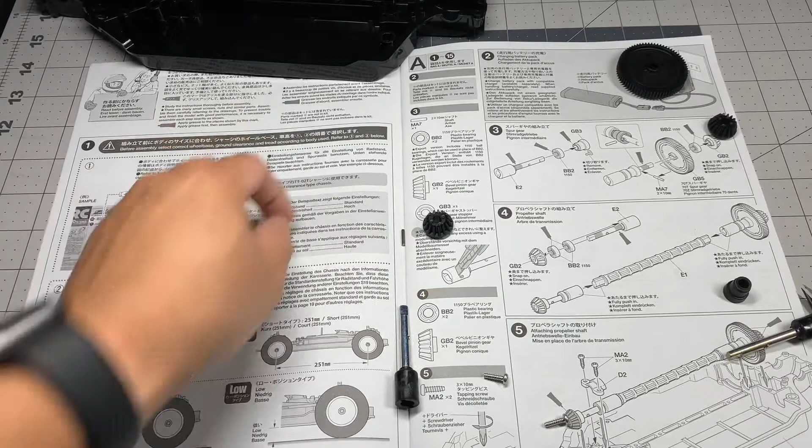This kit, the sand shaker, is going to be the standard 257mm wheelbase, and it's going to have the high clearance. So we're going to be building this just a little bit differently than other TT-02 kits I've built in the past, but everything else should be just the same.

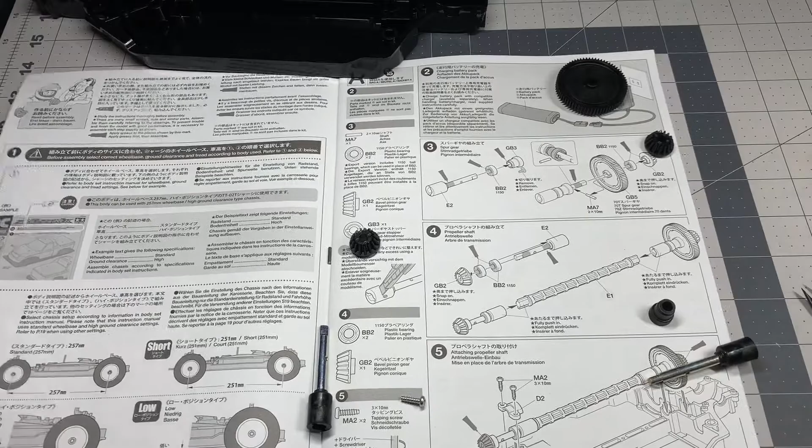So I always start off by looking at the steps and figuring out what we need. Step one is just a specification. Step two, we already talked about the wheelbase. And then you're going to go ahead and charge the battery. They always assume you're going to build this all in one day. So if you have a trickle charger and a nickel metal hydride battery, you want to start charging, because it's going to take like 8 hours to charge this.

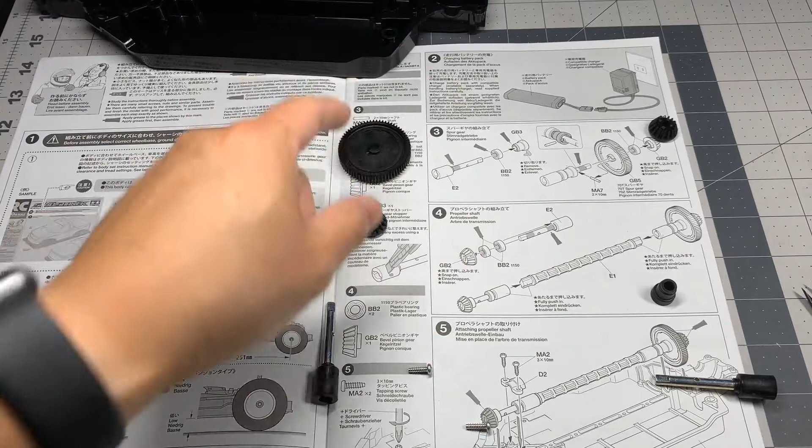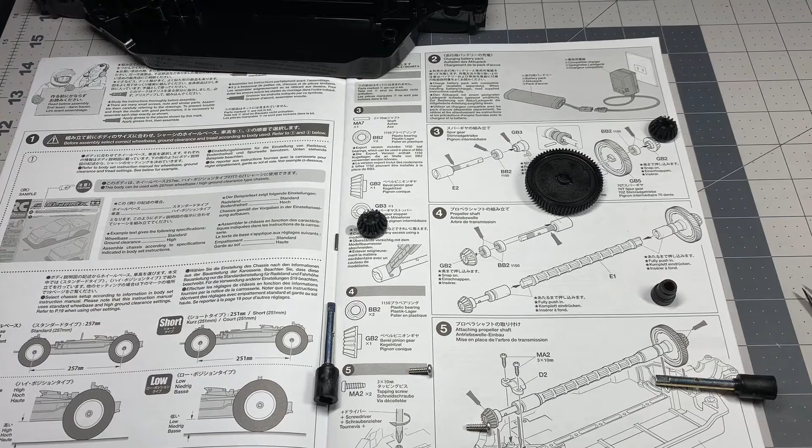And step three, we're actually going to start building. We need this MA7 pin and plastic bearings. And if you didn't buy bearings, you're going to be using this bag right here. And if you didn't buy bearings, go ahead and watch my video, top 5 things that you need to buy to go with your Tamiya RC kit.

But I went ahead and bought bearings as usual. Let me get these open. And I know I'm going to need a few of them for the first steps here.

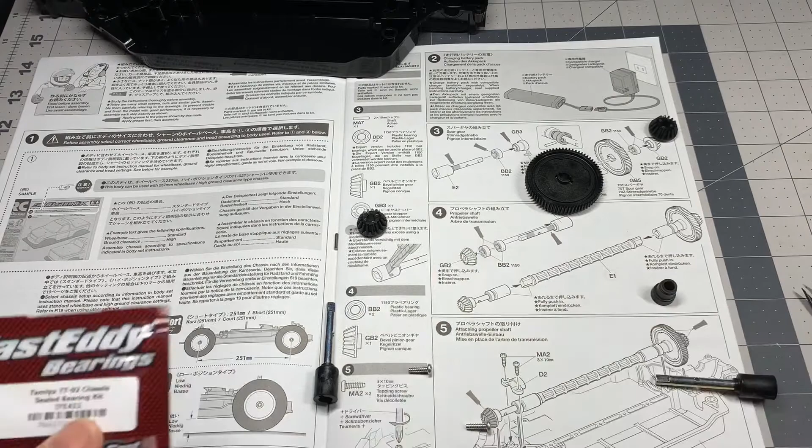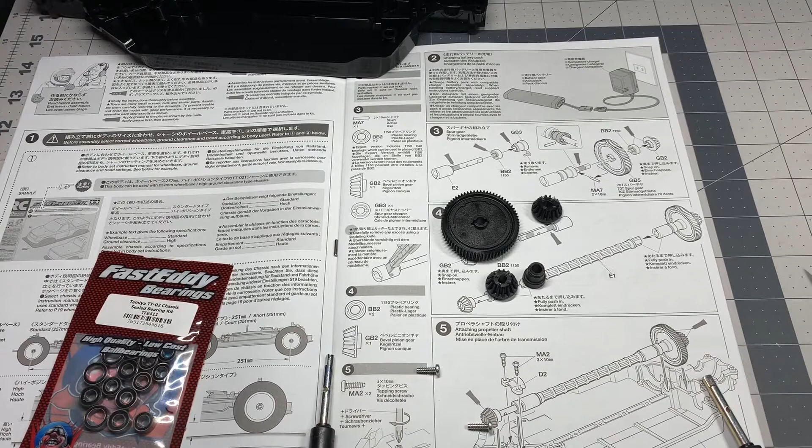You need to find this bevel gear, and these gears, the spur gear and all these parts right here, these 4 parts, were all in the same bag. The propeller joints and the propeller was on a tree by itself. And the bearings, of course, were in this bag. And the screws that you're going to need later on in this step and this pin right here were all in the A bag, and you just have to look for them.

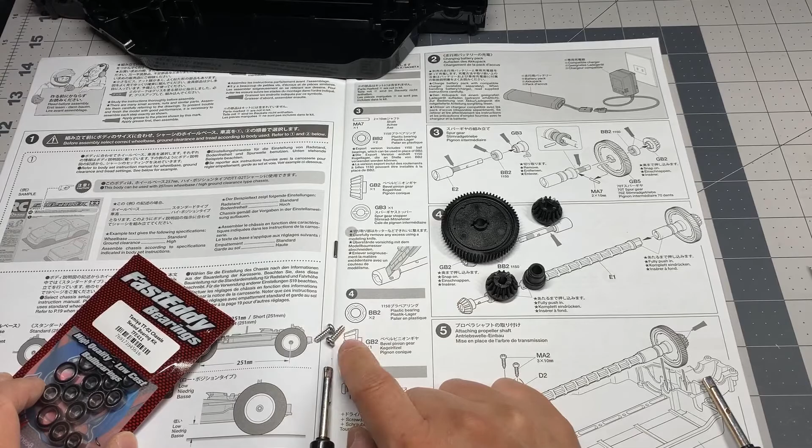The pin was kind of a little bit hard to find, but if you look for the black pinion gear, you'll find it there. And these are pretty common, these are everywhere. Okay, so let's go ahead and get started.

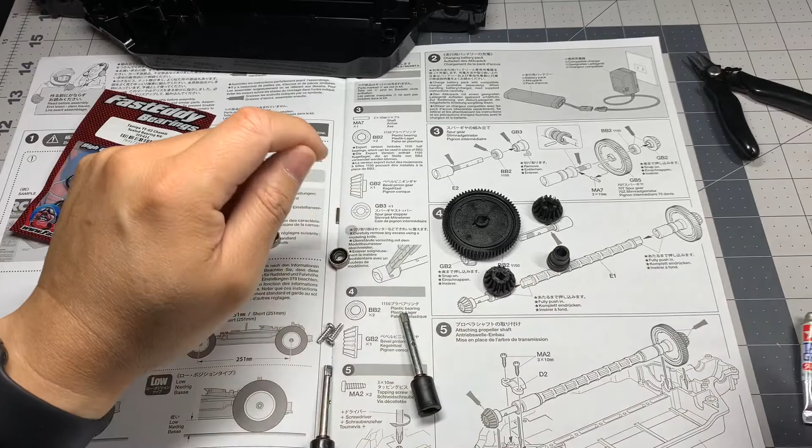Okay, the only thing you need for this build was your flush cutters to get the parts off the parts tree, and a little bit of grease. This is included in the kit. I have an old one from the last build, so I'm going to finish using that.

Step 3 here calls for taking this propeller joint, putting a little bit of grease right here. Actually, I'm going to skip that step. If you're using the plastic bushings, go ahead and do that. I'm using ball bearings, I'm not going to need to grease there, as well as grease the bearings.

I will go ahead and put some grease right there, because that is rubbing up against, that's going to be right here, possibly rubbing up against the bearing.

Okay, all I'm going to do is put the pin there and make sure it lines up, like so.

And then I'm going to take the spur gear, and before I put it in, I'm going to put some grease right there. But the spur gear on this side has a notch. That's the side you want to go towards that pin right there.

So it's asking for some grease right where the spur gear is going to be, so that's what I'm going to do. I'm going to spread some right there, like so. Again, side with the notch, and push it up against that pin and make sure it sets all the way in.

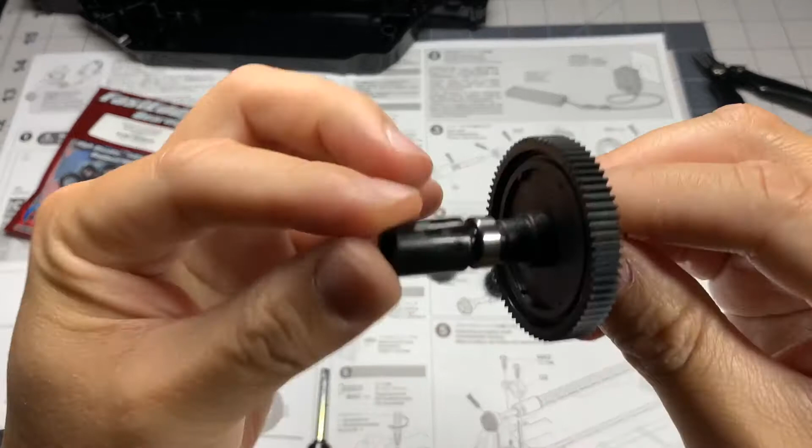So make sure your spur gear goes all the way touching that piece right there.

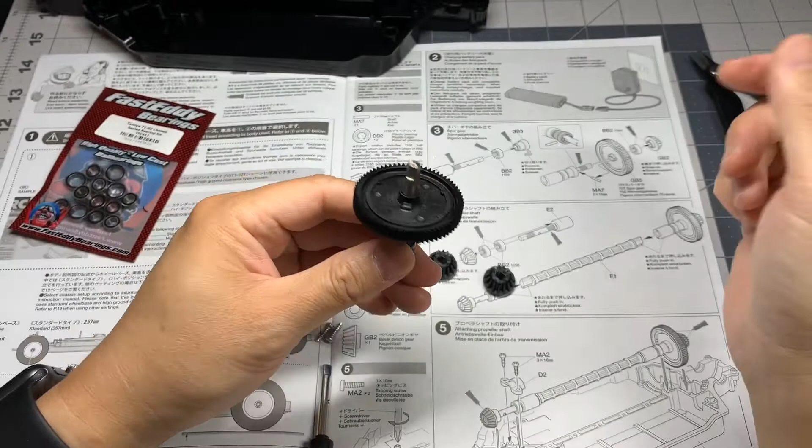Okay, then we're going to put another bearing. Again, if you're using bushing, go ahead and grease that, and then put the bevel gear behind that. We're going to hold on to this, put it aside. I'm going to be setting it into the chassis a little bit later on.

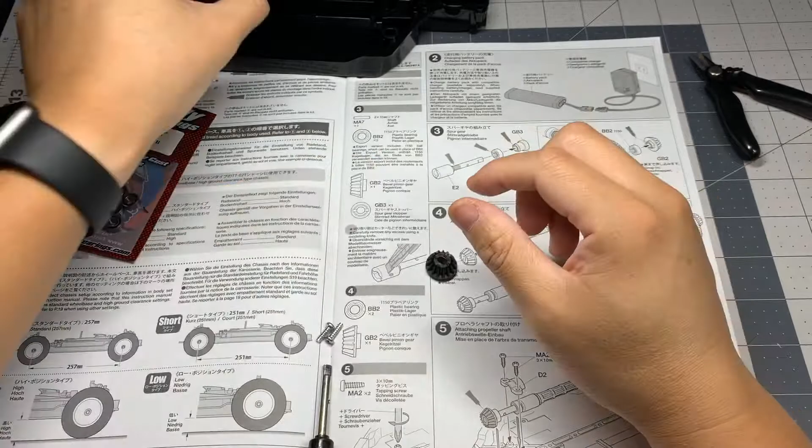The next step, we're going to take the other propeller joint. Again, we need the bearings. We're going to take the other propeller joint and put 2 bearings on there. Again, if you're using plastic bearings, please put some grease where it's indicated, right there and there. Going to put the other bevel gear there.

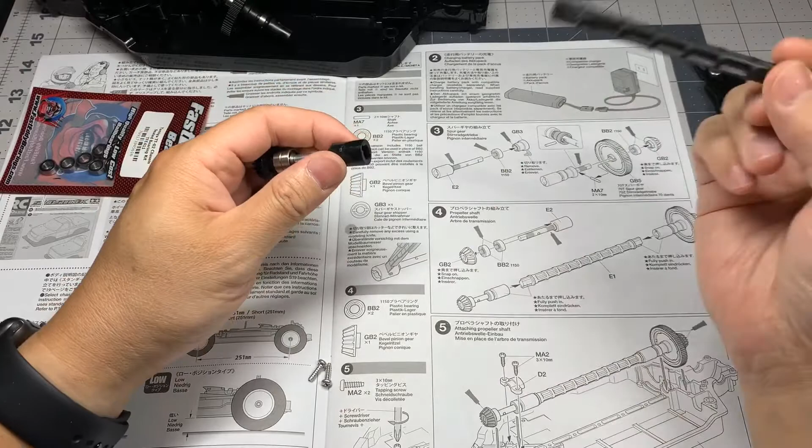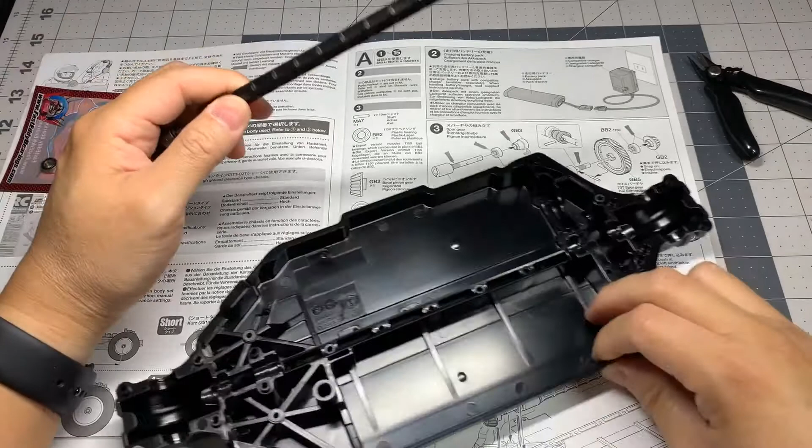And now we're going to connect everything. First, I'm going to take one end of the propeller shaft or drive shaft and put that into one joint and put the other side onto the spur gear. And then we're going to set this in there, lining up the bearings.

The bearing is going to sit in that notch right here. And on this side is going to sit on those 2 notches, and make sure the bevel gear stays attached. And like so, want to make sure the bearings are resting in the right place.

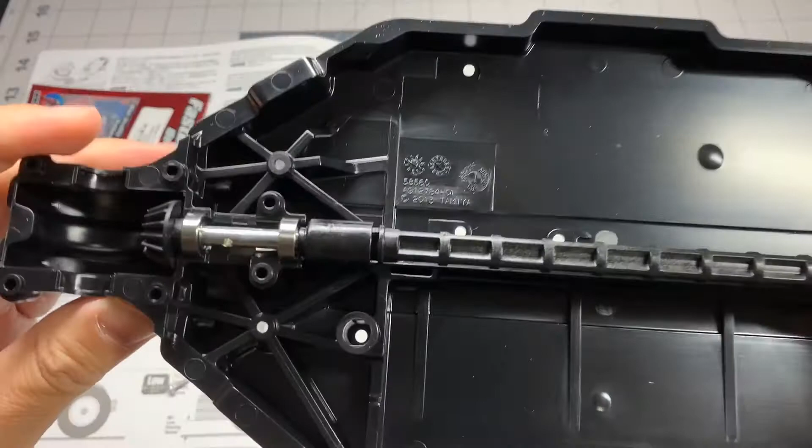So let me get in close. So the bearing rests in here and here in the front of the chassis, and in the back you want to make sure it's resting in that notch and that notch right there.

And then we're going to go ahead and close this up so it doesn't fall out, and it's just easy enough. This is a bearing cover, covers that bearing right there.

There's 2 MA2 screws, and it's standard Phillips head screws, so you don't need any special tools there. Go ahead and tighten that down.

And if you're continuing to build, go ahead and put grease here in the bevel gears and the spur gear and the front bevel gear as well. I am going to keep making this video, but I'm not going to put the grease on just yet because I usually tend to rub stuff on here and grease gets all over the place.

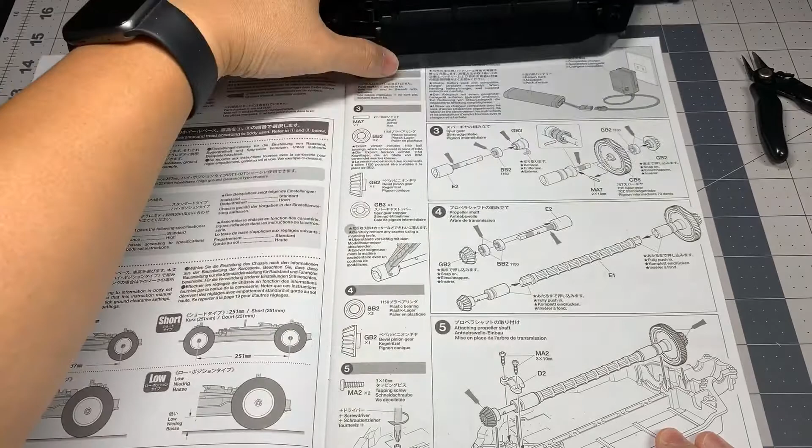But that's it, we're going to finish the first steps here. We completed steps 1, 2, 3, 4, and 5. In the next video, we're going to be working on the diffs. This is going to be the rear diff, front diff, and then we're going to install the arms, close up the gearbox, and we're going to stop at step 10 in the next video.